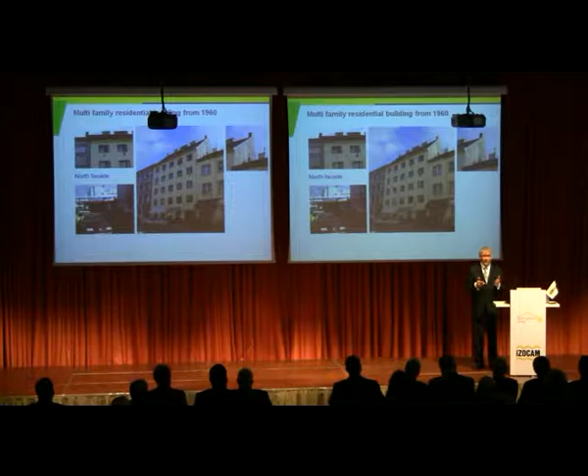cheapest way to insulate the building envelope. But one said, okay, I'm already 80, I'm not interested. So everyone has another motivation not to do it. And so I said, no, I cannot wait, so I have to do it.

And I tried it. So you see, it's a very noisy street, there's a train, and in the sleeping room I had a heating system, in the living room a heating system. I bought it from my neighbor, and every room was heated with this.

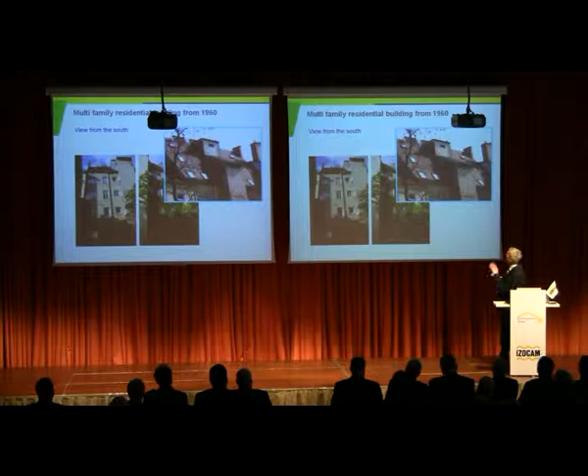Here is a neighbor house, and when we go to the south side, here it's a pitched roof already, and here you see it better. So north side is straight, south side is a slope, so all difficulties we can have.

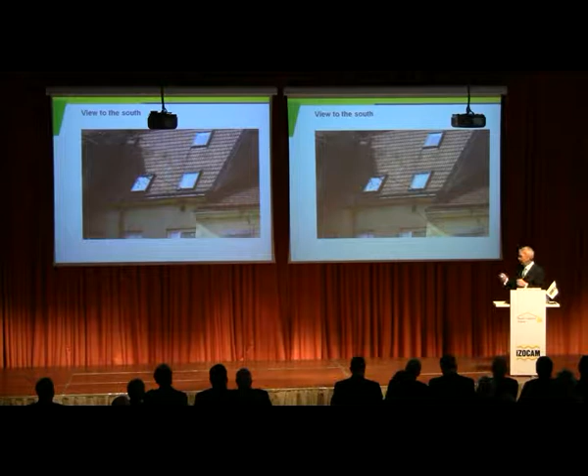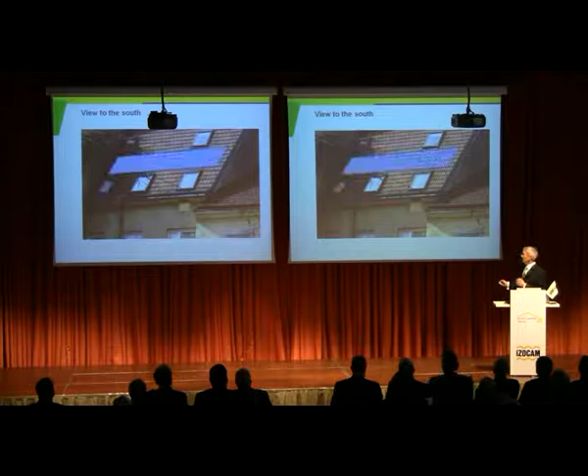And the idea was just to make the windows bigger and add some photovoltaic, and also here you see the remaining heating system. So I tried to close this. This was the given situation.

Now from the point of view of construction physics, outside insulation is always cheaper, always better, always more safe. But I had no choice. I wanted to do it, and I will do inside insulation.

When you have no insulation on the outer wall - here I live, below my friend, my neighbor Günther lives - so we are both heating this non-insulated building structure. A lot of energy losses, but the structure is warm.

As soon as we make inside insulation, you see, the building structure gets cold, because it's not heated - here is insulation material, and the ceiling, the load-bearing ceiling, gets colder. Before there was no problem, but now here is a critical point, because now suddenly there can be a risk of condensation.

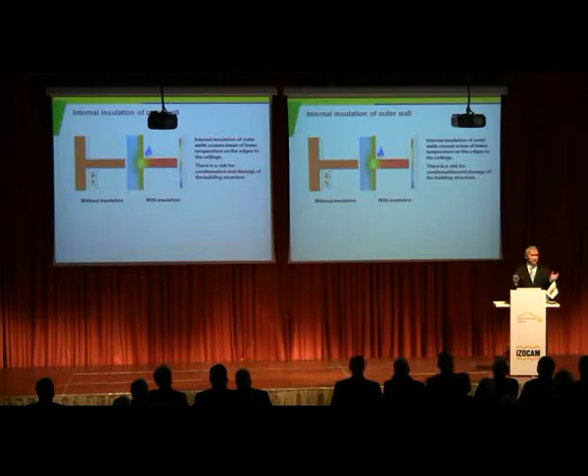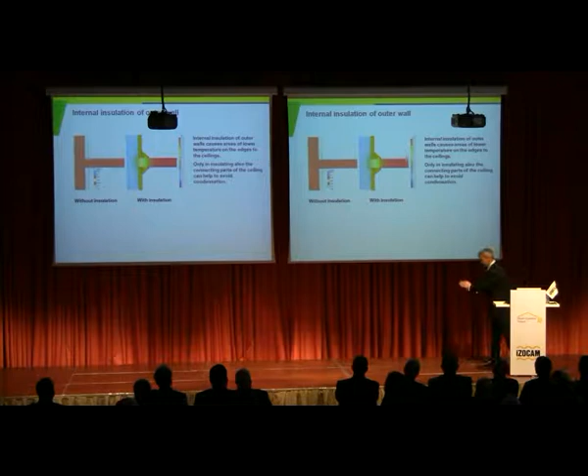The Passive House Institute says, okay, then put some additional insulation here to protect this place from condensation, so the temperature is warm enough. But how to do in my apartment such a triangle of insulation? So I decided I just make the insulation big enough to cover this critical point, and at the same time I can put 25-30 centimeters and have it at passive house level for the climate conditions in Vienna. This was the approach.

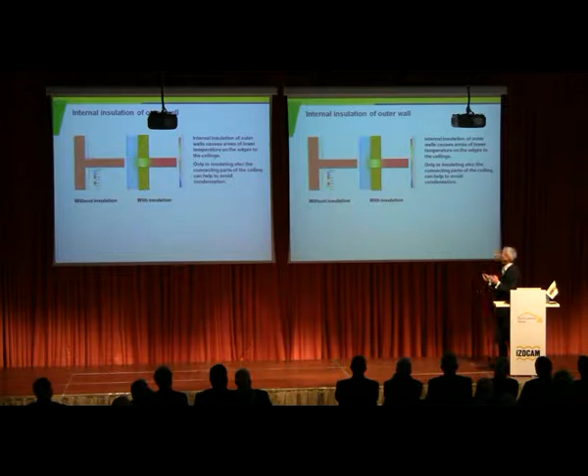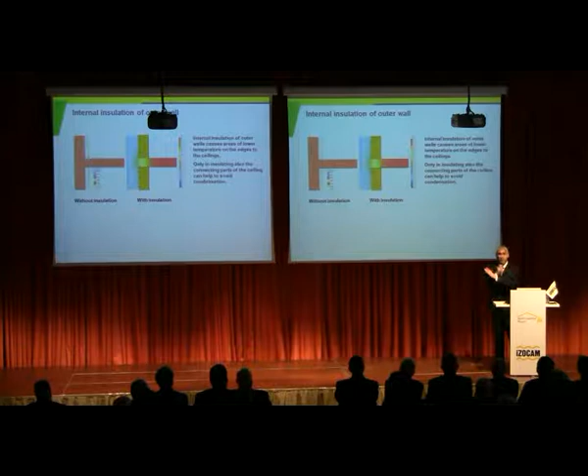Please, don't do this like I did if this is not a concrete ceiling. If this is a wooden old house with a wooden floor, don't do inside insulation then, because the condensation can come in and the wood can rot down. This is very, very dangerous - you cannot control it, you cannot see it. So, if it's wood, please don't copy my strategy. If it's concrete, you can try.

Okay, of course, outside insulation would always be the best, because there is a homogeneous temperature, no stress for the building structure.

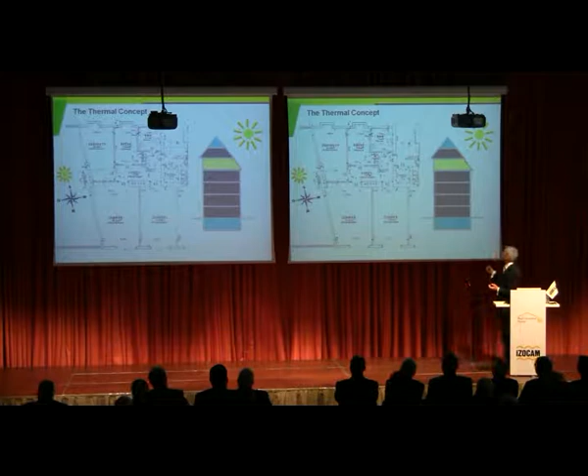Here you see the building. Here is the north side, south side, and my apartment is in the sandwich - above is Alexandra, below is Günther, so it's warm, and I have the north and the south. You see, a very social approach.

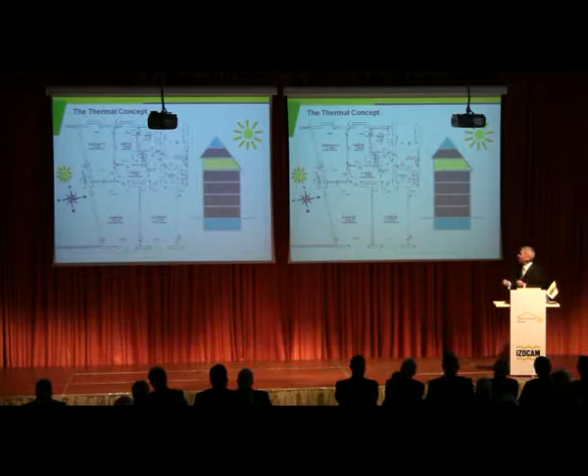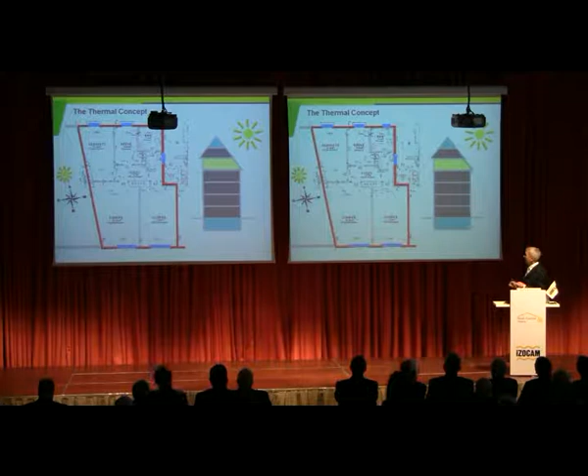This is the plan. First I decided the warm building envelope, then the windows, the entrance door to the corridor, to the staircase, the south windows, the north windows, and here it's a little door to my other apartment. So this I wanted to make nice - my survival cell if one day we have no oil.

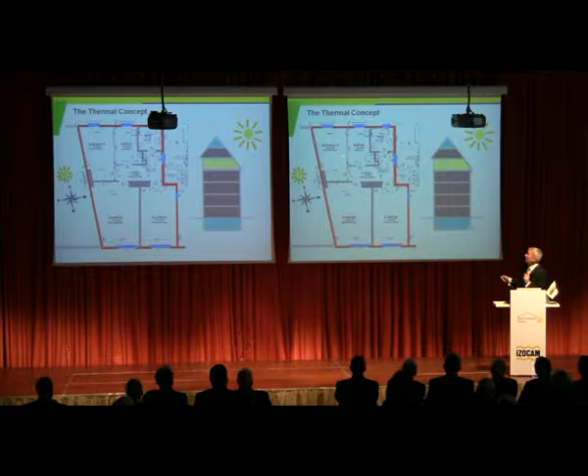So this is the sleeping room, living room, bathroom. Here is the kitchen, and here is a little cabinet, a small room. And we wanted to make this a big room just to have a nice living kitchen.

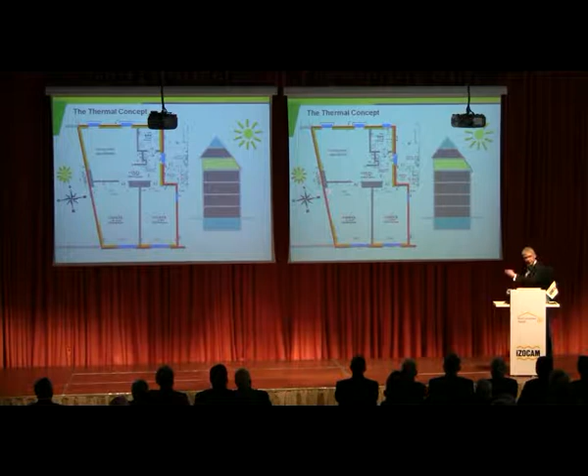This was the motivation from my wife. My motivation was to make it passive. So for making it passive, you see inside insulation everywhere - here to the neighbor house, the firewall, to the staircase. Here it's warm, here's my second apartment, it's warm, okay, I don't need it. But here also inside insulation, to cover this thermal bridge to the neighbor house, because it's a firewall, I have to do it also.

And a ventilation system - I put it here in the kitchen, the air ventilation system, Konfor. You see fresh air supply, short direct ways to the sleeping room, to the living room, and all the exhaust air from the bathroom and from the kitchen. Very, very simple, very direct.

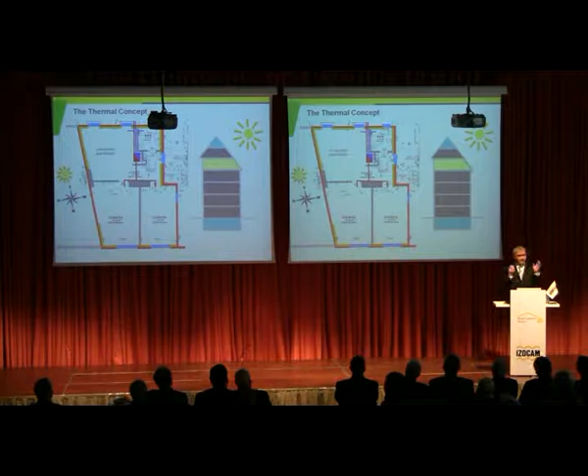Okay, now let's come to the north side. Unfortunately it's reversed, but you see the U values for the window. It's a passive house with U value 0.8. We have inside insulation 25 centimeters with U value 0.12, and the flanking transmission is also covered with U value 0.28. So the building envelope from my side is here.

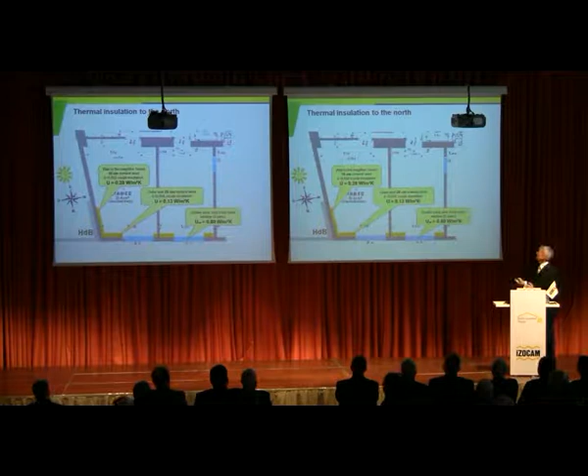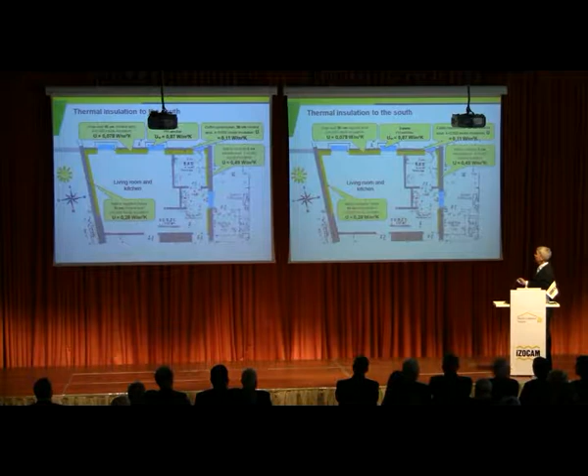Excellent, let's see the south side. There is a pitched roof and a knee wall. In the pitched roof I have U value 0.11 with 30 centimeters insulation. In the knee wall, 0.078 with 35 centimeter insulation, and a triple glazing Roto Atelier roof window with 0.87. Then the flanking transmission to the neighbor house and to the staircase, and of course a passive house entrance door with 0.68.

So when the people came and looked at it, I was not at home, my wife was at home, and the serviceman for the door said, 'Oh, there must be a mistake, you don't need such a good door.' Then my wife said, 'No, as I know my husband, he loves his door.' But the man said, 'No, the staircase anyway is warm.' Yes, why is the staircase warm? Because the doors are so bad and we heat it. So this is a passive house entrance door I use as an apartment entrance door.

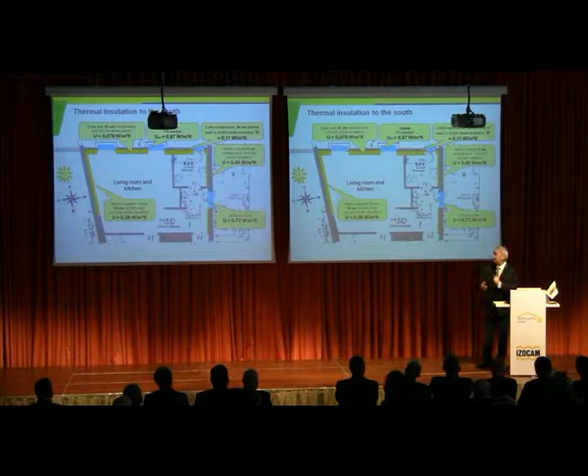Only the best components. Now this, I bought it from my neighbor - he was a carpenter. And the heating system was all functionally nice, a little old-fashioned. But when you heated it, it was immediately very hot, very warm - you couldn't go very close, there were turbulences in the air. When you closed it, it was a perfect thermal bridge, it became cold immediately, and also very noisy - it was also a noise bridge. This was in the living room, the same here in the sleeping room, also the heating system.

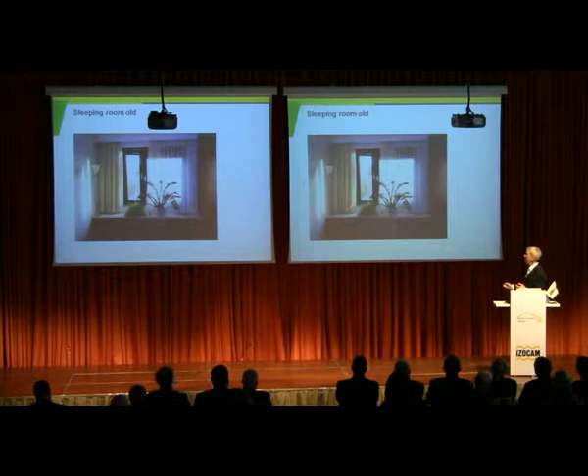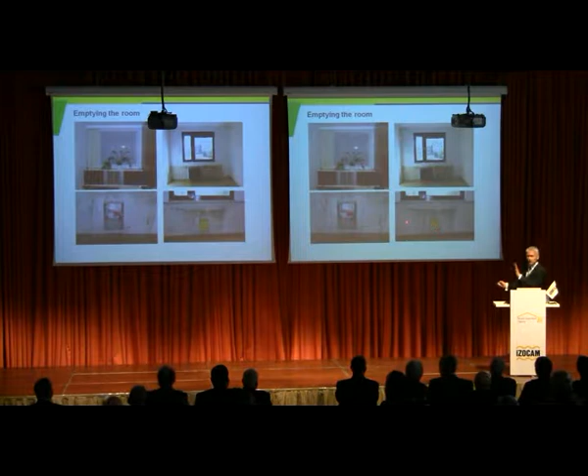Now the work was very simple. I just removed all the heating system. There was a hole - I covered this just with some glass wool panel, and I put inside a wooden frame completely for the triple glazing window. You will see immediately, I have to make this all airtight to seal it.

So there was old electric light wires here. Yes, you see the electric wires, I put them out of the critical part, you see here, not later to penetrate the vapor barrier. So all electrical was put out - later I have not to make a hole to go through with the electric pipes in the vapor barrier.

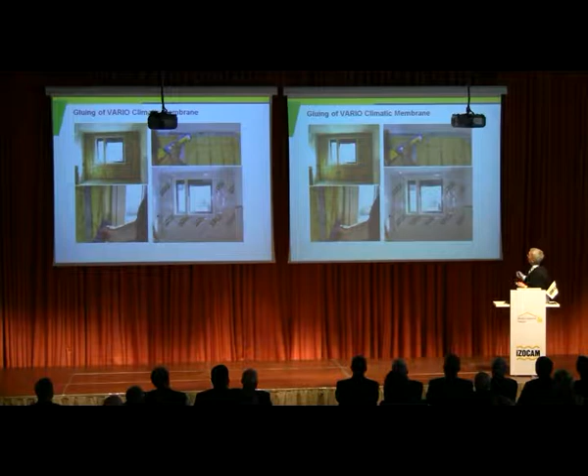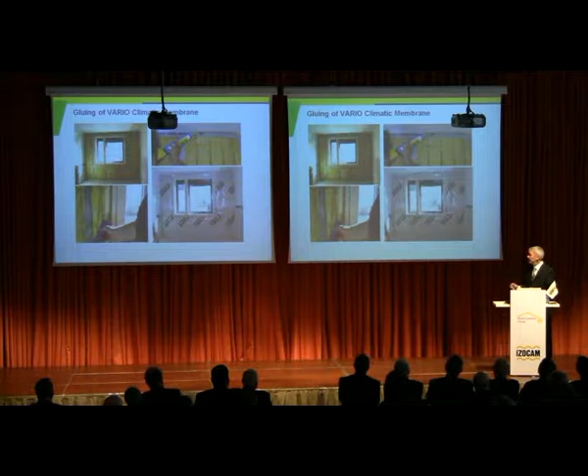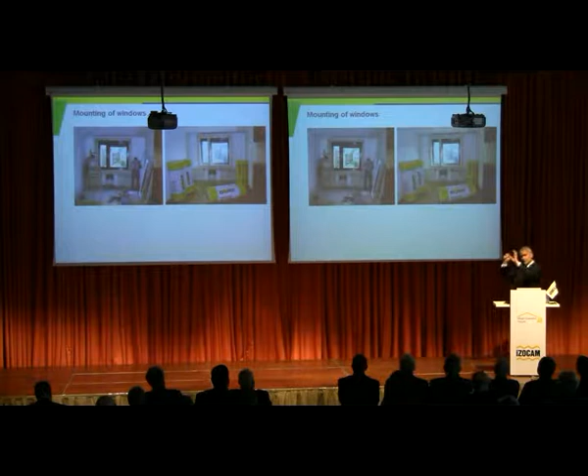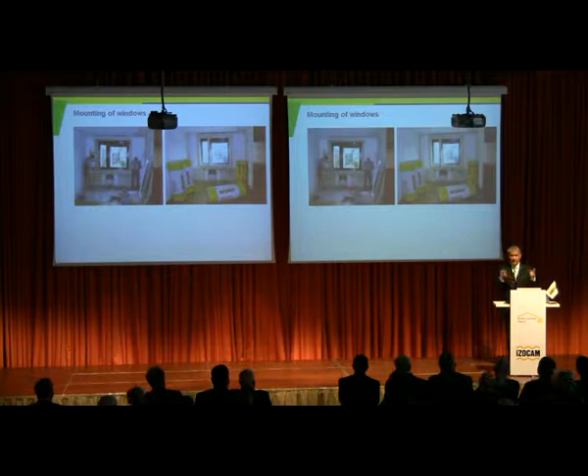And what you see also, maybe you see here - you see I kept the old double glazing window outside. I did not change anything on the facade, but I put inside an additional triple glazing. So I have double glazing and triple glazing, which is a perfect airtight and a perfect acoustic mass-spring-mass system, because as I showed you before, it is a very, very noisy street.

Okay, we go here. Yes, so this wall was easily done, but then it remains this thermal bridge in this flanking building part. It was easily done, you see - just an additional insulation here, vapor barrier, gypsum board, and just differentiated with some colors. And now here I'm working, and here I prepared the presentation for you.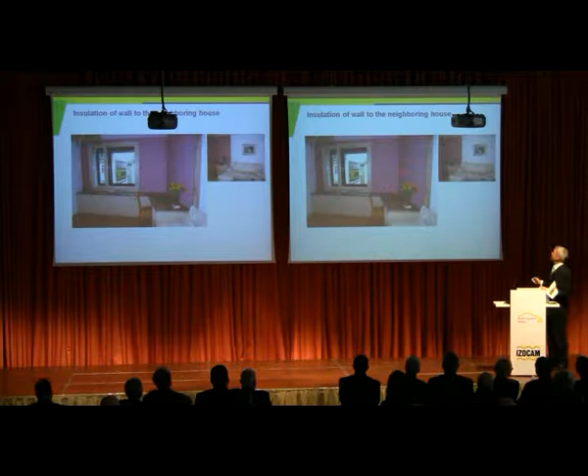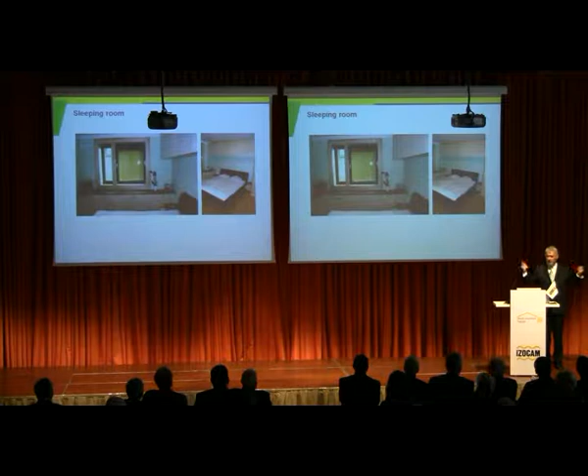I'm sitting here. The same in the sleeping room, you see the old double glazing plus the triple glazing, and now I sleep very, very quiet, no noise. Just like in a sound studio, I hear my own blood - no traffic noise, but I hear Alexandra much better, my neighbor.

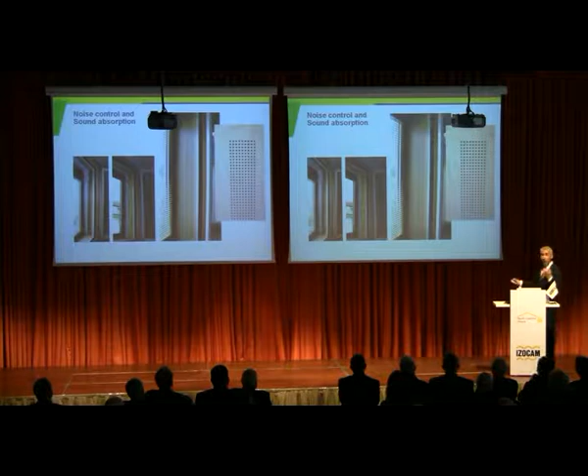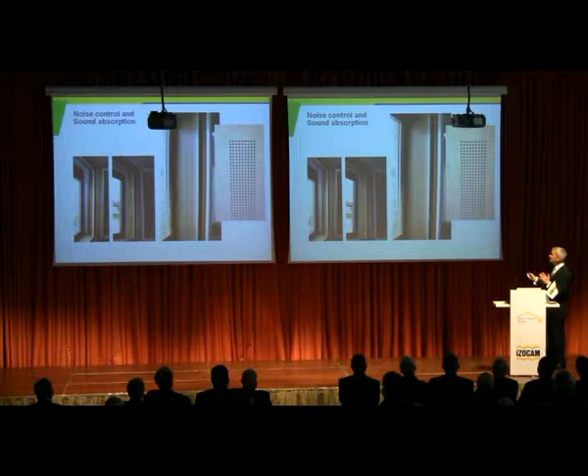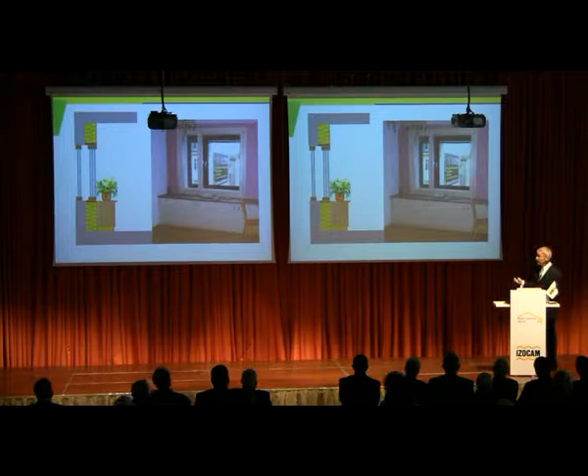So you see there is some space between those two windows. I put some glass wool inside, open porous, so excellent for acoustic absorption, and a wood plate with some holes. So I have a perfect mass spring mass system, and the energy even goes around here in the frame. So mass spring mass, extremely noise protecting from the outside. So I can sleep wonderful, and always have fresh air with it.

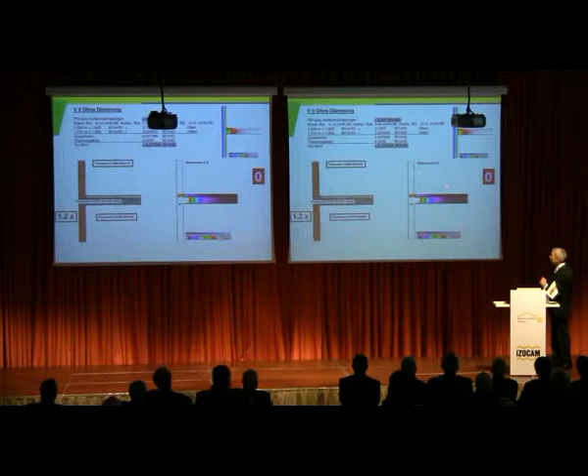Now, from construction physics, which might be interesting for you. Here I'm living, here is my friend Günther, and where it's warm it's a dark color, so there is no energy flow, no heat flow. Whereas the colors, there's a lot of energy and heat flow. Before renovation, this yellow part is my energy consumption in this area, and the blue part is energy consumption of Günther in this area.

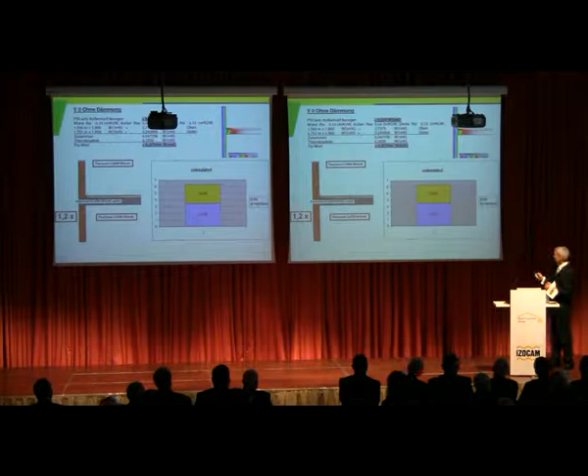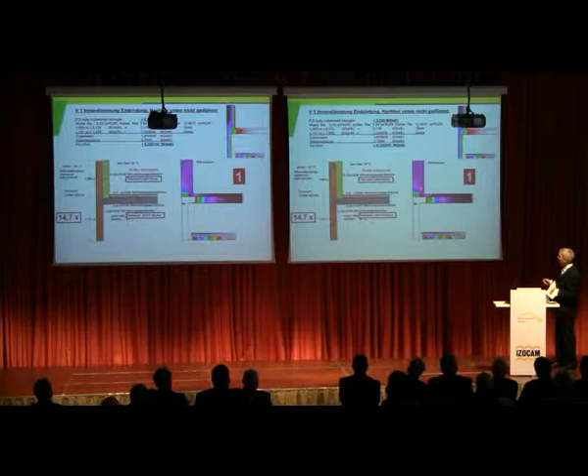It's not exactly a psi value, it's calculated on 1.5 meter, it is this area. But what we see very fine is if I made the inside insulation, you see, no heat flow to the outside, no critical part in this area. But for Günther, you see, it's critical, and I reduced dramatically my energy consumption in this area, but Günther has to heat a little more because my poor friend now has alone to heat the thermal bridge. But sometimes he comes up, drinks some wine with me, and anyway, I live now, and I heat also.

Maybe one day he has the same idea and says, okay Robert, I will also do insulation inside. What happens, you see? But still here remains a little critical part, what I said. It's warm here, but this thermal bridge we could not avoid. But he also comes dramatically down with his energy consumption.

Now maybe Günther will do nothing, but all the other people of the house say, okay, now we make the insulation outside. Then you see from construction physics already it's perfect. There's no risk of condensation, no risk of mold growth, whatever, and energy consumption very much down. This would be the most expensive solution: I do it, Günther does it, and 10 years later all the neighbors do it. Okay, energy consumption is down.

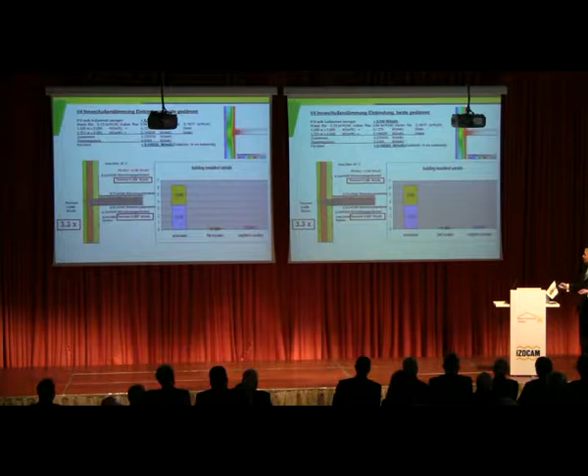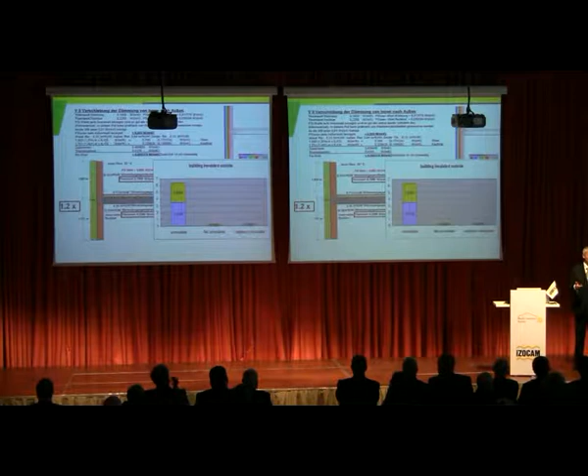But conclusion, the cheapest and the best is just to do it outside, and energy consumption is down. So now we've played all the possibilities. It is a compromise to make inside insulation, but for me it was the only way to do it and not to wait 10, 15 years for the neighbors to follow me.

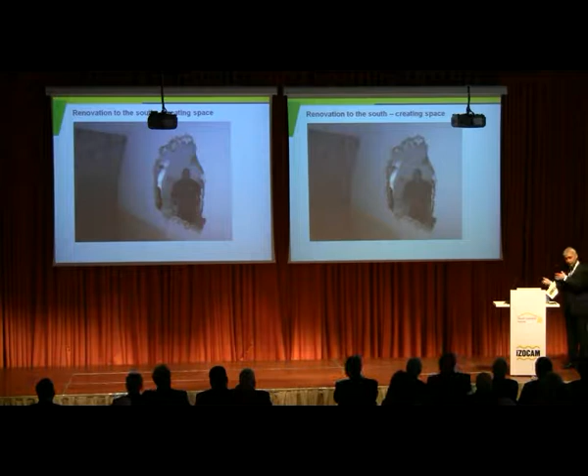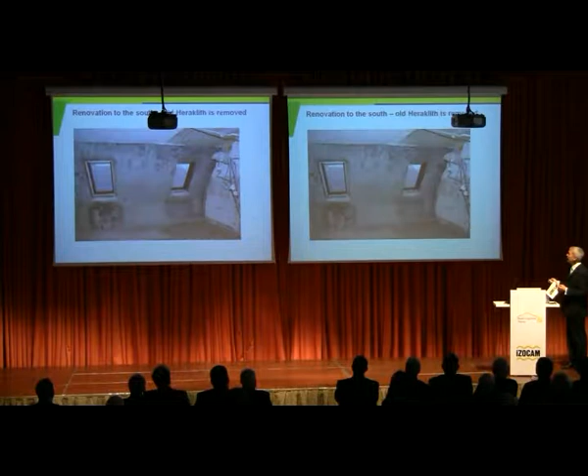So now let's go to the south side, how I did it. You see again a Heraklith here, we had to remove it. This was when my wife went to her workplace in the morning, then we could start. And when she came home, look how happy she looks now. It starts to be nice, you can imagine her kitchen. And yes, we removed all here.

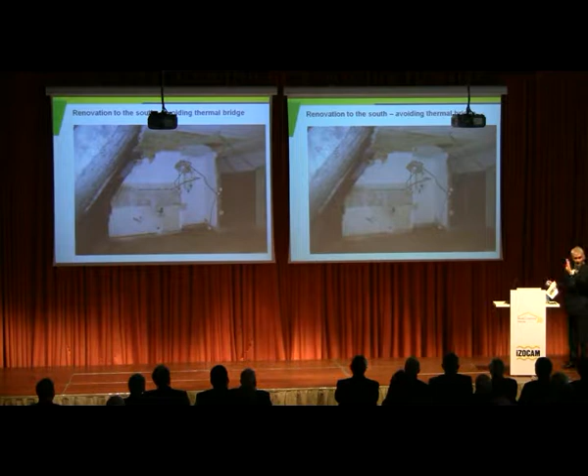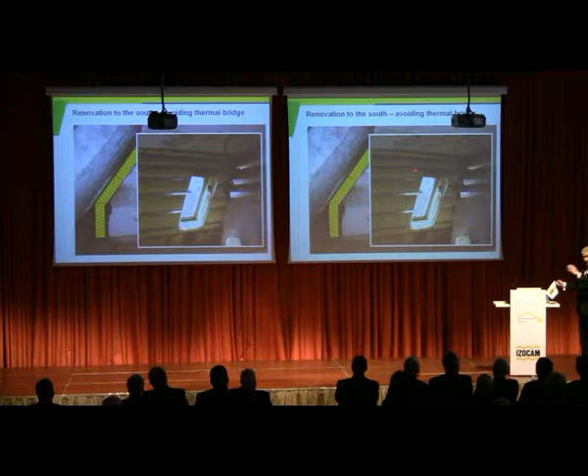Here you see, this is the wall to the bathroom, and we cut it out here to avoid the thermal bridge. But I could not avoid it in the ceiling, so later to have the insulation inside here. That's why we cut it out. And later you see, in the pitched roof insulation, it goes completely through. And here you see already the absorbers, noise absorbers, for the ventilation pipes coming in.

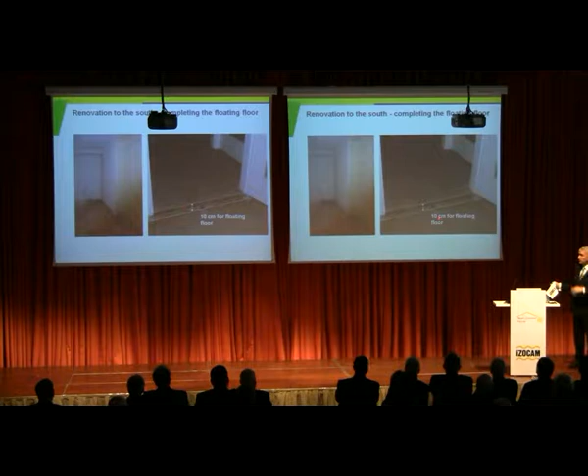A hopeful moment, we were in the middle of our project, still we were encouraged. We had to remove also a part of this old wooden floor with some ashes and so on, so it was very dusty work, but we wanted 10 centimeters for the floor. So we had to make a gravel bed and put impact sound insulation on glass wool, very elastic, good for the low frequencies. Of course, the mixing machine we carried up to the fourth floor, 1.5 tons of cement in my apartment. We were mixing here in the corridor, and in the kitchen we made this nice floating floor.

One detail: we did not go with the floating floor completely out. You see, we kept here a space so that we can go with the insulation down to the load-bearing ceiling, to avoid this additional thermal bridge here.

The vapor barrier is glued to the load-bearing ceiling, goes up to the floating floor, is glued here, and here it goes up with a different value, and it's protected by gypsum board so we cannot later harm or damage it.

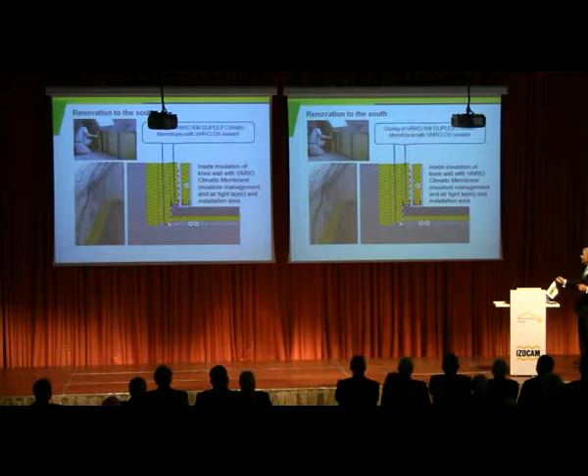Here you have the installation area with the pipes, water pipes, electricity, another insulation with glass wool, 5 centimeters, and gypsum board. Here you see we made a nice spachtel or rendering so it's very flat, and it's glued on the load bearing and also on the floating floor.

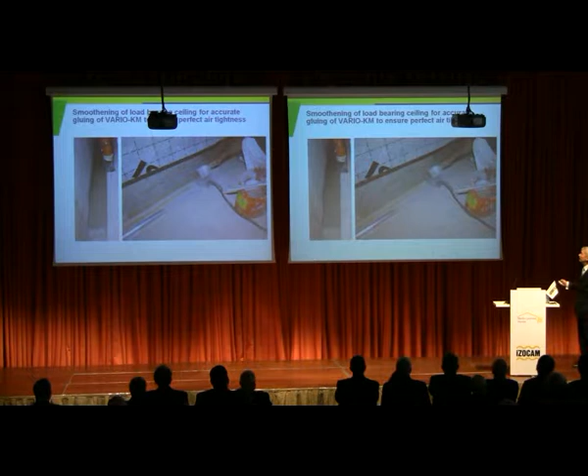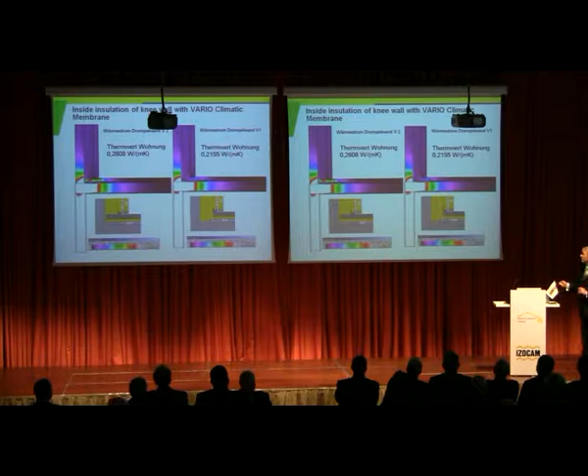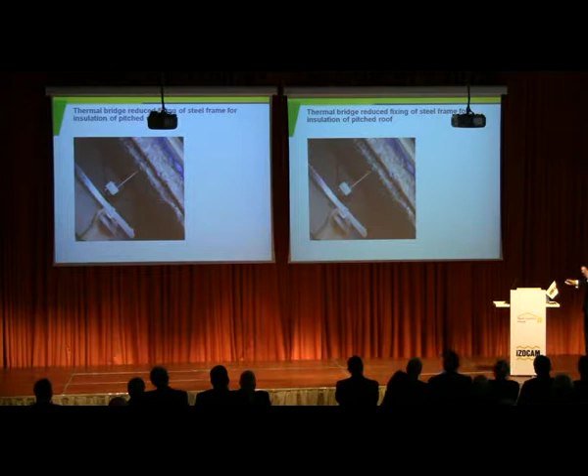I had to think about the construction without thermal bridges. So you see some steel, we put some plastic to interrupt. Here's the thermal transmission, and with this construction, just a few points reduced on thermal bridges.

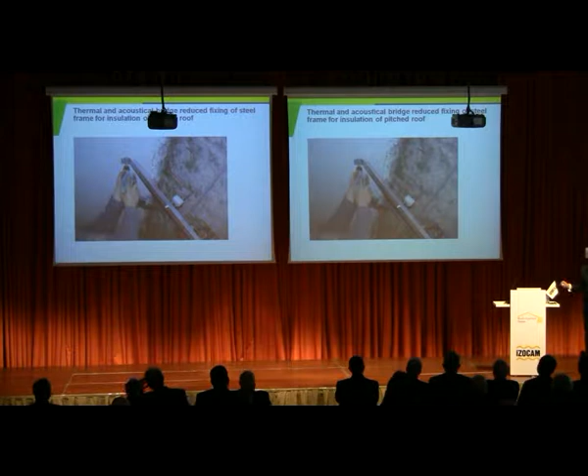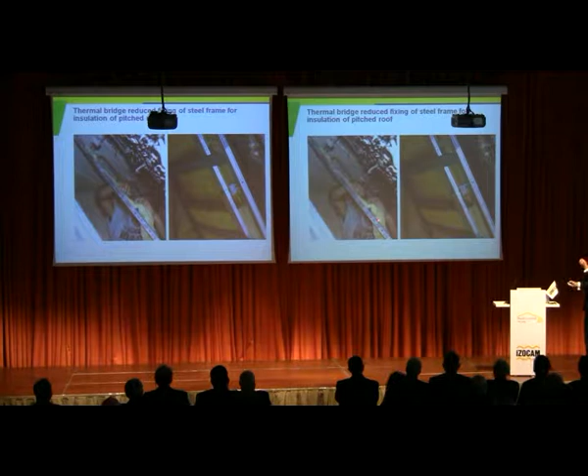We fixed it to the ceiling with some rubber plates to have it acoustically very soft, to have good sound or noise control, noise protection. Even here in the rails, in the frames, we put some glass wool, and you see a few points - a very nice construction without thermal bridges.

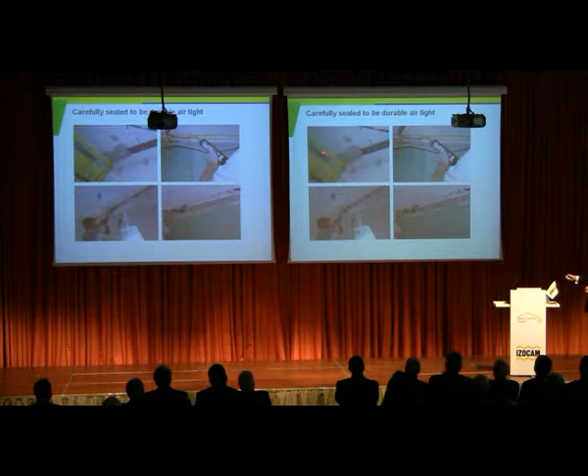So here lives Alexandra. And when we have this inside insulation and outside insulation, here always is a thermal bridge, so I had to cover it here. What I did, I made a little present to Alexandra.

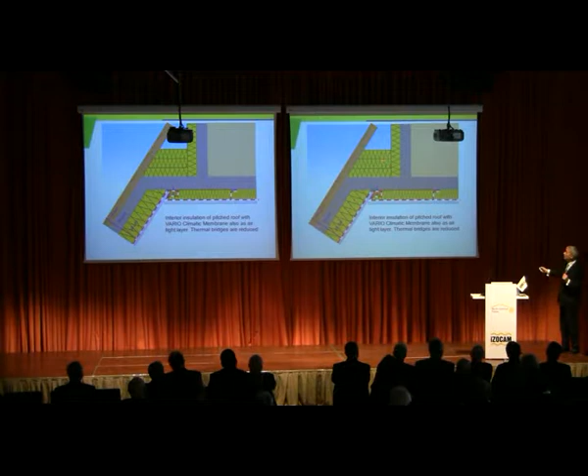I made outside wall insulation for her here and put insulation material here inside. We made some steps, opened here, one jumped in, and then we put all the insulation in this area to have no thermal bridges. Yeah, here you see.

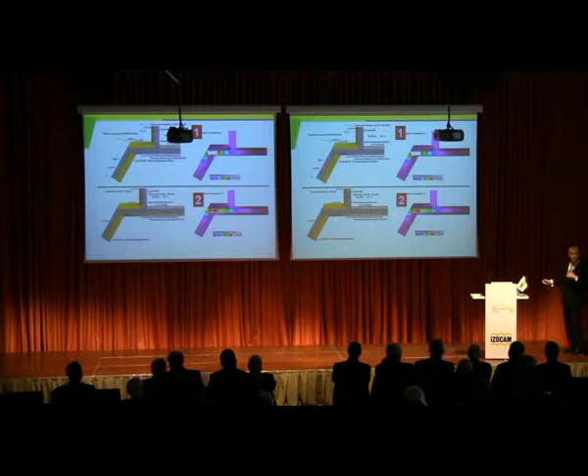You see the drawing. As I said, whenever you have outside insulation and inside insulation in combination, there is a thermal bridge - you see it here. So we put here a suspended ceiling, airtight, just to avoid this thermal bridge here.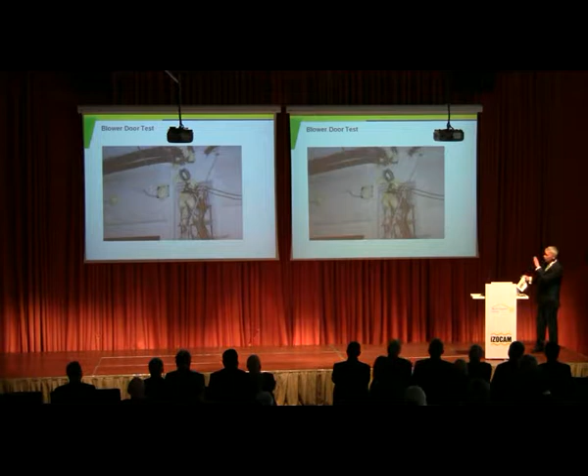Blower door test. So these are already the pipes for the ventilation system. We closed it, and it turned out no problem with electricity, but here where the old wall was and the rendering system was damaged, there was some circulation.

It was not tight. The solution was very simple, just with some gypsum spachtel or rendering. We closed it with elastic metal clips. We made the frame for the suspended ceiling with glass wool, put it airtight again, and had perfect noise protection around. And we reduced the storage mass.

So we reduced the mass. In summer, when it's hot, I have outside shading, and in the night I only have to ventilate out the warm air. But the warm air is not stored because I have inside insulation, so I don't have this hot air in the concrete structure. Only the warm air to ventilate out, and it's very convenient.

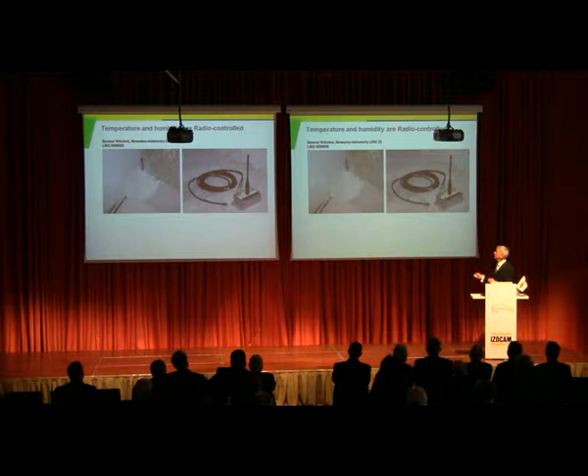Here, in the critical point where we have a geometrical thermal bridge, we put in some sensors with radio transmission. So it's humidity and temperature I can measure with an accumulator for 2 years, and then I see what might happen in this critical point. The same I have in the bathroom.

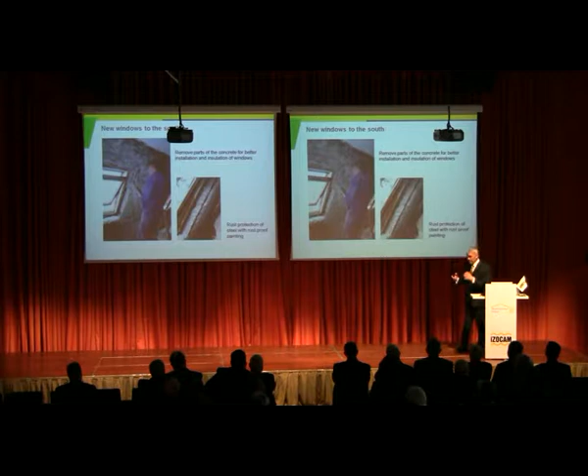So as I said, it's a very heavy concrete structure. Around the window we had to remove this concrete to win some space to have no thermal bridges when we put the windows in. So this was the flower day, because after this noisy work I went to the neighbors with some flowers, some bottle of wine, to apologize, but all went well.

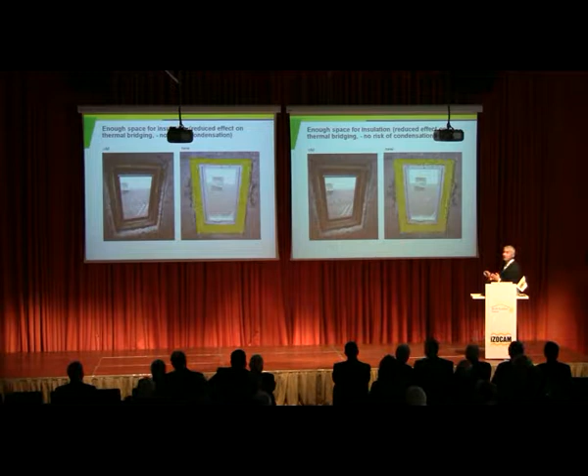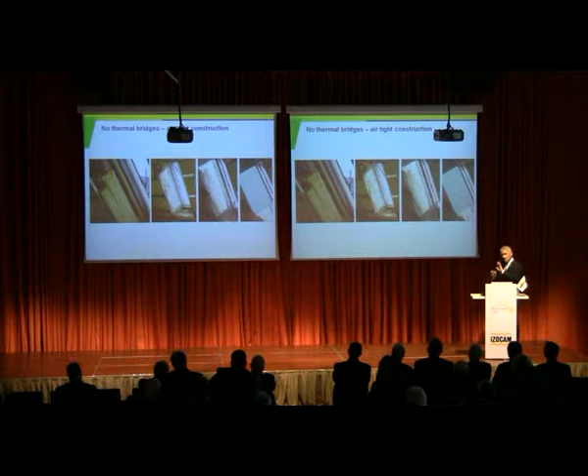Here you see we need a lot of space to put the insulation material in without thermal bridges. And here you see how it's done - 30 centimeters of insulation, here is some foam, it's completely insulated without thermal bridges. This was the second flower day because we had to make this opening for the ventilation system to go through.

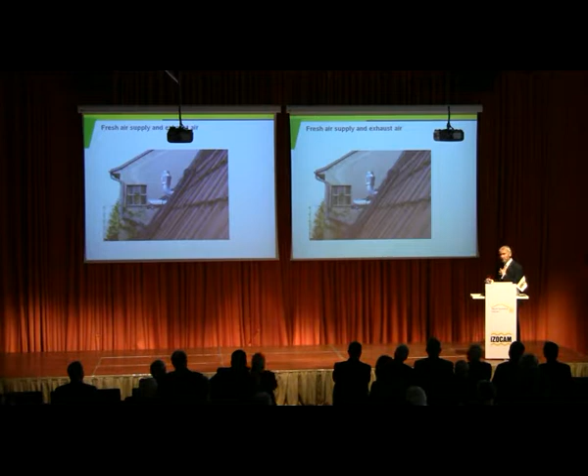Again, vibrating, noising, still to the train station. But you see, fresh air coming in, exhaust air going out. It's filtered with a fine filter, F7, no mosquitoes, no fine dust. It's perfect. I'm not allergic, but if I would be allergic, I would have always best air.

So you see the sound absorbers, not to have the sound from outside or from one room to the others, to have it quiet. All is covered, and also with glass wool. It's very nice. Here we made the hole to the sleeping room, and this is the passive house entrance door.

You see, simple elements just put together. I did not calculate before, I calculated later, and it turned out it's a passive house. I did what I could do. So from this point of view, renovation is simple. What I can do, I do. And then it turns out, but I tried to do all the best.

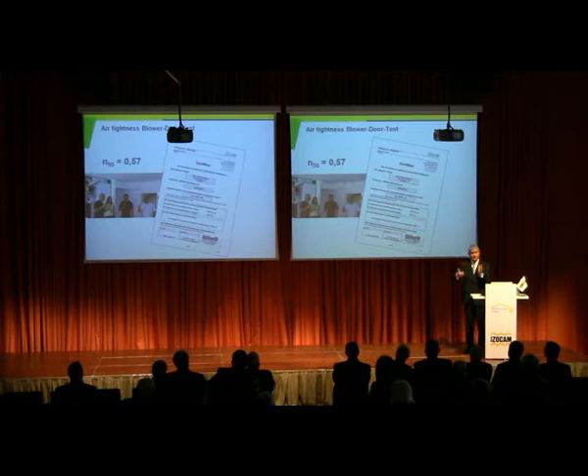And the blower test was 0.57. So 0.60 is a success. It was a great success because it's a small volume, 77 square meters only. So if you have a little leakage in a small volume, the exchange rate is much higher.

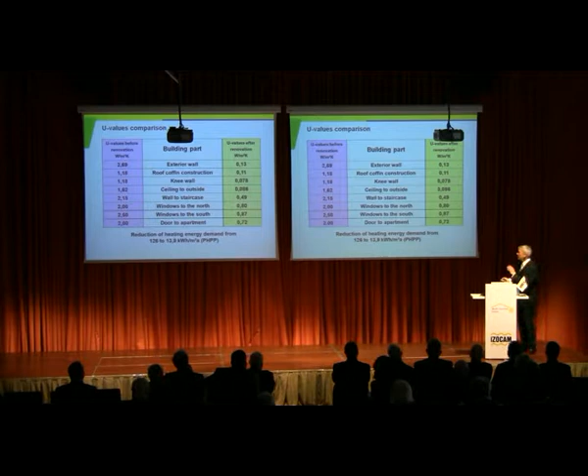126 kilowatt hours per square meter. After renovation on passive house level, 12.9. Even with inside-outside insulation and the thermal bridges. So it's an excellent, excellent result.

So far it was very cheap, because after 50 years anyway, I had to renovate the windows, change electricity, change the pipes and all. So anyway, I had to do it. But now, to come away from the gas, to change to the heat pump, these units are still, in my opinion, too expensive. But okay, what shall I do?

I started. Here you have the air-air heat exchanger, the heat pump, and here 180 liter warm water. I chose this unit because it's the smallest. We are 2 people, we don't need more.

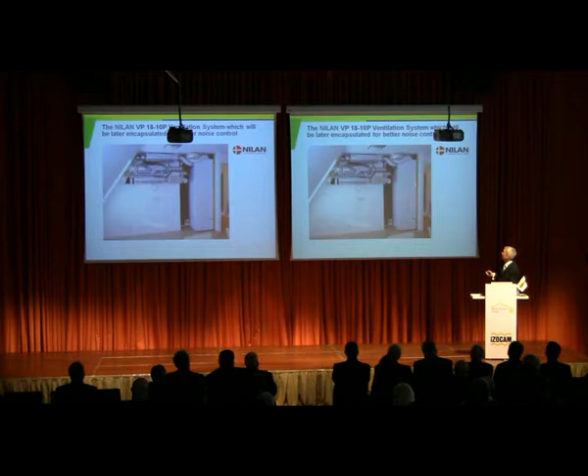Here you see the installation, the pipe - I did all myself - absorbing material, and all is covered. No noise, it's perfect. Now the living experiences.

In winter, when it was outside -5 to -10 degrees, inside 21.4 degrees. It's perfect. In summer, with outside shading, the ventilation system makes first warm water, it cools down and dries, and then the air goes in.

So when it has outside 30-32 degrees, inside I had 24 to 25 degrees. It was very nice, and I never had this before, and I don't have it in my office. But here I have it. So it looks now today, so we can enjoy.

This was the bathroom before, typical in 1950, so you can imagine Sophia Loren jumping out. No. She can come today, so it's always nice for elderly people. For me, of course, not for her.

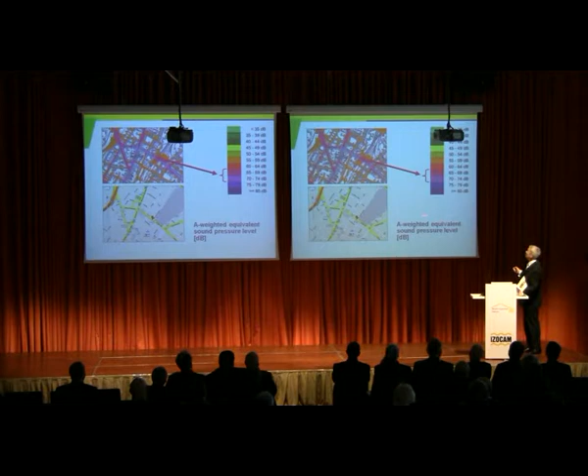And I told you it's a very noisy area, so this is an A-weighted equivalent sound pressure level. It's 65 to 74, a very noisy road in this map. And afterwards I wanted to know, so we made measurements. The outside noise and inside, but we had to use very sensitive microphones going down to -10 decibel. We had a TGM with a special institute in Vienna.

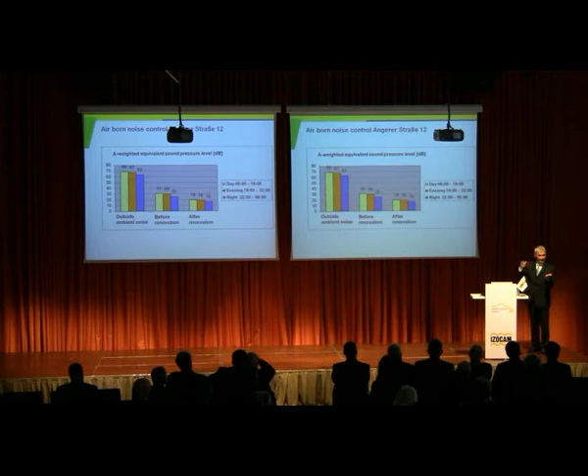And what turned out? Outside noise during day, orange is evening, and night 63 decibel. Before renovation, 25 decibel. After renovation, 16 decibel in the night, A-weighted. It would go down to 0 decibel because there is no noise from outside, but the 16 decibel comes from the ventilation system, the background noise. But at 16 decibel, you sleep like a baby.

Before, I had 77 square meters. After renovation, maybe 70. So I reduced my heating volume. I save again some energy. And I built in 15 cubic meters of insulation material.

But I have a comfort which I never enjoyed before. And whatever will be in the future with heating costs, whatever, I'm inert. I'm out of the discussion.

Seriously, please come, because we already had 2 buses in front. The neighbors are calling my wife. My wife is used to it. It's not a problem. You can come, you can see, you can feel. You cannot sleep all at once at night to feel it, but just to see how the atmosphere and the air quality is. Thank you very much.